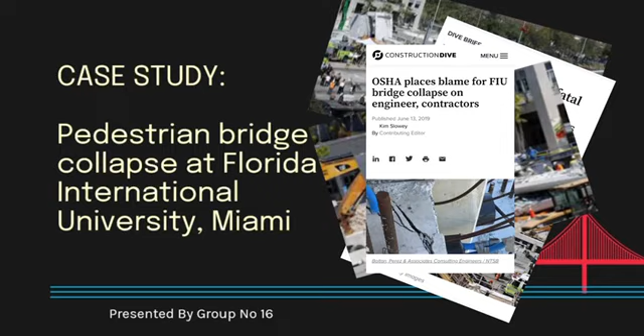Assalamualaikum. My name is Siti Shafilana binti Yunus and I will do the introduction of the pedestrian bridge collapse in Florida.

The accident occurred at Florida International University, which is located in Miami. This accident involved 5 drivers and 1 employee, who suffered fatal injuries. This happened on 15 March 2018 around 1:45 p.m. A pedestrian bridge that was being built collapsed.

This is because the concrete truss had developed numerous wide and deep structural cracks. The bridge was being built as a single concrete truss measuring about 174 feet and weighed roughly 950 tons. Just 5 days before the collapse, it had been placed over the piers. There was supposed to be a concrete truss adjacent.

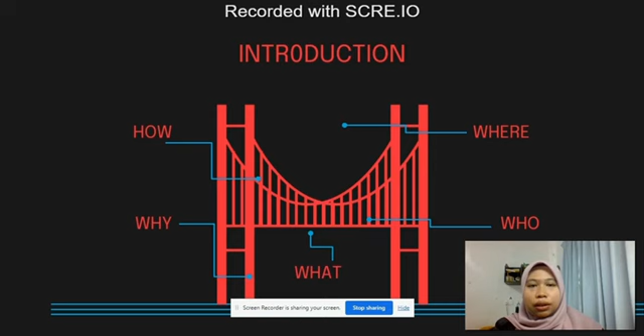Assalamualaikum warahmatullahi wabarakatuh. My name is Indah Shravin Tazari and I will explain my part, which is the cause of the accident. First of all, I will show you the picture of the bridge. The three important parts of the bridge are the deck, the 12 truss members and the canopy. The first cracks happened at truss members number 11 and 12, but I will explain it in detail later.

After the investigation, OSHA stated that the main cause of this accident was the design calculation error made by the structural bridge design consultant, FIGG Bridge Engineers. The first structural reason was the shear failure at the junction where the diagonal truss member joined the bottom deck of the bridge at the northern support node.

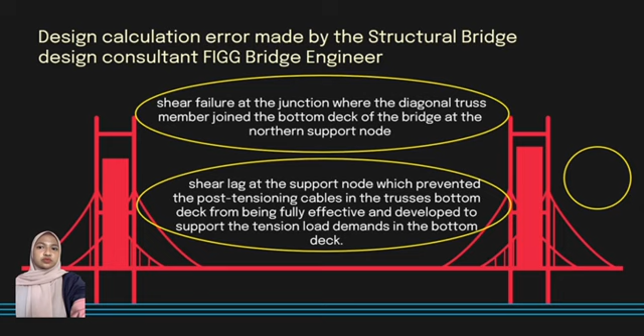The second structural design reason was shear lag at the support node, which prevented the post-tensioning cable in the truss's bottom deck from being fully effective and developed to support the tension load demands in the bottom deck. So I will briefly explain the timeline and the few events leading up to the FIU bridge collapse.

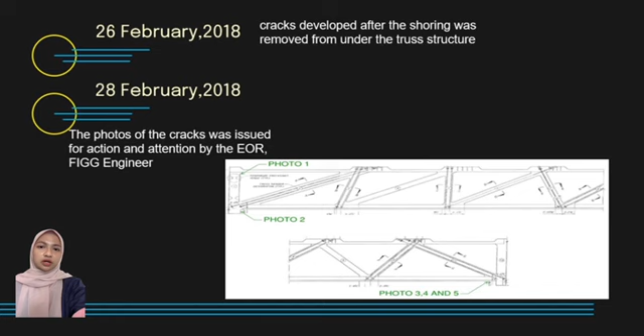The first cracks developed after the shoring was removed from under the truss structure on 26 February, and on 28 February the photo was taken. The photo of the cracks was issued for action by the FIGG engineer, and on 7 March FIGG decided that there was no safety concern for photo 1 and photo 2, and for photos 3, 4 and 5 FIGG asked MCM to seal the cracks.

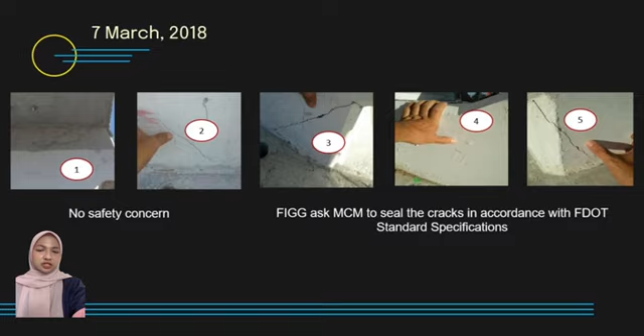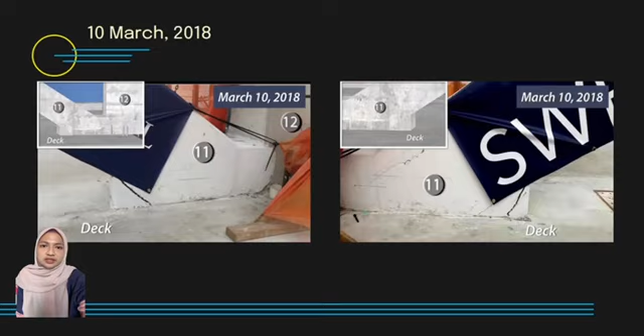The important part is this design was non-redundant, meaning failure of an individual truss member can cause collapse of the bridge. Next, the truss was transported into its final position and placed on the pier and pylon supports. At this time, no other cracks were evident other than those outlined previously on 7 March.

Then VSL, representing the post-tensioning team, was to destress the bars in diagonal members 12 and 11. As they began the destressing process, cracks began to appear at multiple locations around the node point where the bottom of member 11 met the bottom deck of the truss, as you can see in the picture.

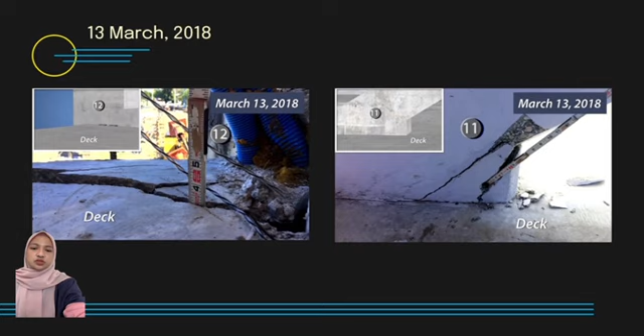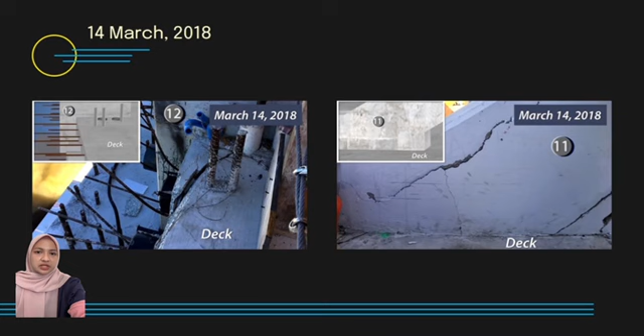The next day, FIGG analysed the cracks and recommended that MCM place shims under the bottom deck of the truss as previously instructed by FIGG. So MCM instructed VSL to proceed with the preparation to retension the PT bars in diagonal member 11. MCM organised a crane to be present on 15 March 2018 to facilitate the works.

In the morning of 15 March 2018, two structural engineers from FIGG attended the site to inspect the bridge and the cracks. Next, a meeting was held with attendees from FIGG, MCM, FDOT and BPA present. FIGG still stuck to their opinion that the cracks did not have any safety concerns.

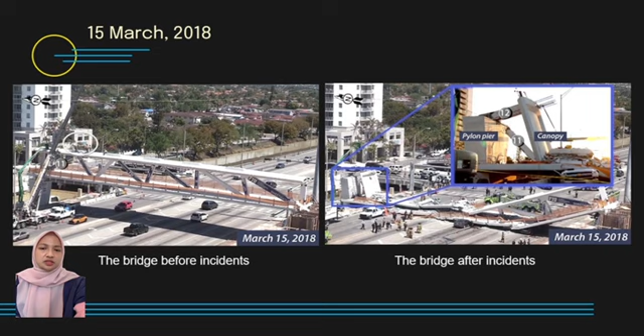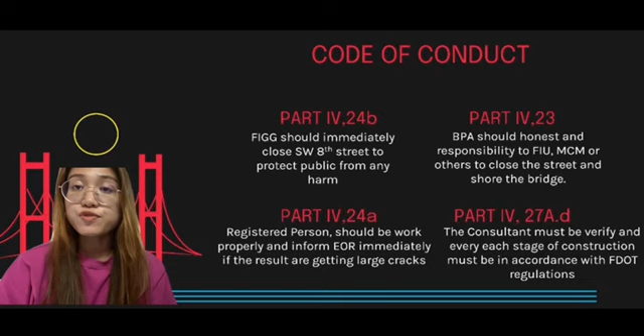It should provide safety first to the public and students. Next is Part IV-24B. FIGG should immediately close SW 8th Street to protect the public from any harm. The fifth is Part IV-23. BPA should be honest and responsible to FIU, MCM or others to close the street and shore the bridge. The sixth code of conduct is Part IV-24A. A registered person should work properly and inform EOR immediately if the results show large cracks.

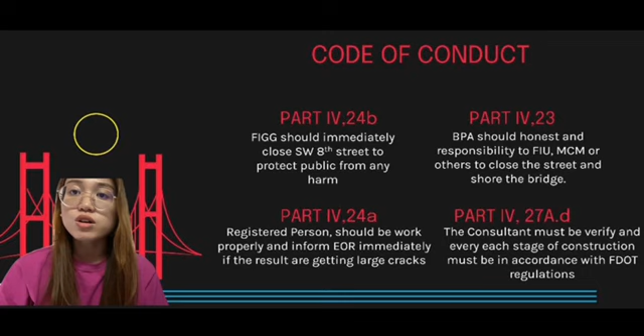Last but not least, the code of conduct related to the ethics. The last one is Part IV-27A.D. The consultant must verify that every stage of construction is in accordance with FDOT regulations.

Hi, Assalamualaikum and good day. My name is Aisha binti Anis. My matric number is 201110736 and I will talk about risk assessment and HIRARC. I will combine these two because the format that I use is the same, but for the HIRARC I will just add the risk control.

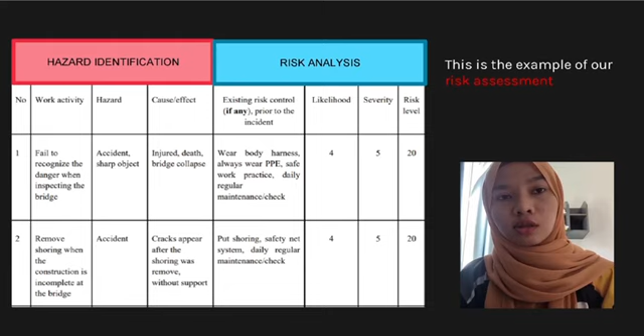Okay, for the risk assessment, first one, the risk level is 20 because the possibility of failing to recognize the danger when inspecting the bridge is high, as it can cause injuries, the project to collapse, and death. For the second problem, the risk level is 20 because removing the shoring when the construction is incomplete caused the crack to appear. It is possibly a big catastrophe.

Next, the risk level is 5 because the engineer relies too much on the computer program when handling the project. Because they didn't detect the crack in the program, they neglected the crack in real life and didn't care for other engineers' opinions. For problem 4, when they neglected the crack, the indifference caused the risk level to be 25 because it is the major cause of the crack widening more and thus the bridge collapse.

For problem 5 and 6, the risk level is 20 because the possibility of motorized cars or engineers or workers being crushed or falling along the bridge is high, and it leads to catastrophic outcomes, which are injuries, permanent injuries, and death.

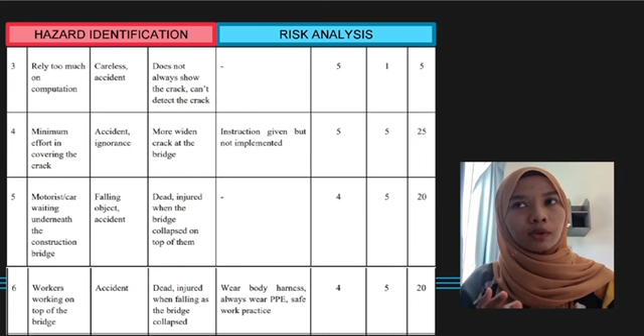For problem 7 and 8, the risk level is also 16 because not closing the street around or during the construction will harm the public citizens with injuries, and affect the surroundings with noise hazard, and heavy loading on the road may cause possible accidents around the public.

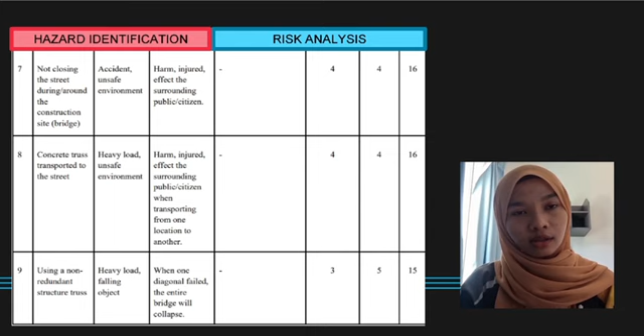For the last problem, which is problem 9, the risk level is 15 as the design is unsuitable and it is conceivable to lead to catastrophe. As one diagonal fails, the entire bridge will collapse. Okay, so we move on to HIRARC. For HIRARC, we just add the risk control.

For the first problem, as in the previous risk assessment, we make sure that the engineers and workers have the qualified certification before being given a task in the construction. And they also have to always wear PPE, follow safe work practice, and do daily regular maintenance. For the second problem, the risk control is we have to do daily regular maintenance and immediately instruct that the bridge be shored so that it can hold the bridge load until the construction is finished.

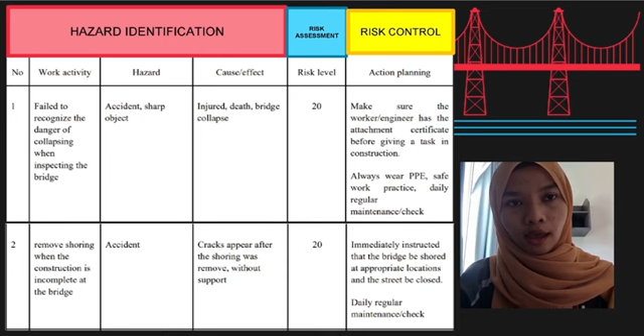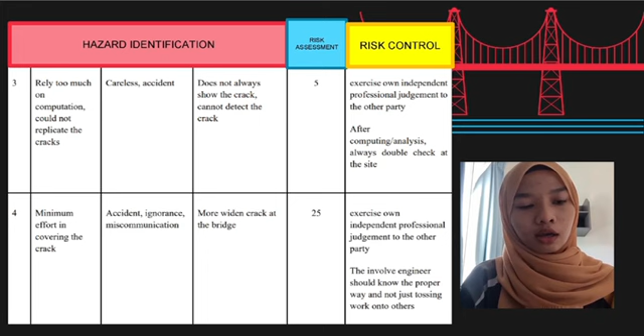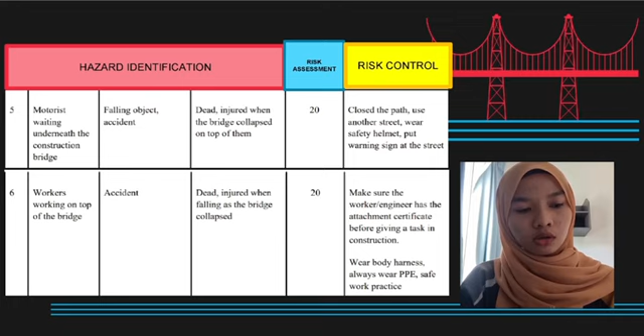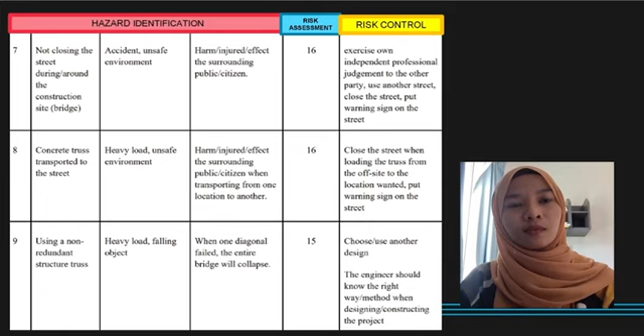From the overall process of hazard identification, risk analysis and risk evaluation, it is noticed that the main cause of this accident is ethical negligence. First, minimal effort covering the cracks. This is due to the negligence of the engineer, which was proven to be the main cause of this case that led to the injuries. Second, ignorance of engineers. The ignorance of engineers in performing their duty well, like removing the shoring when the construction is incomplete at the bridge.

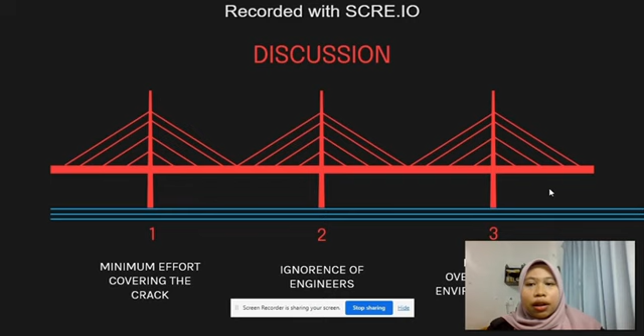Lastly, failure in overseeing the environmental risk. Not closing the street around the construction site during the maintenance, and the concrete truss transported on the street, is proven to be failure in overseeing the environmental risk when construction is ongoing. To conclude the discussion, one employee and 5 motorists were fatally injured and another employee was permanently disabled. This is a number that should be taken seriously.

Members of this profession, engineers, are expected to exhibit the highest standards of honesty and integrity. It is clear that engineering has a direct and vital impact on the quality of life for all people. As stated in the Registration of Engineers Regulations Act 1990, a registered person shall: 1, hold paramount the safety, health and welfare of the public; 2, perform services only in areas of their competence; 3, issue public statements only in an objective and truthful manner; 4, act for each employer or client as faithful agents or trustees;

5, avoid deceptive acts; 6, conduct themselves honorably, responsibly, ethically and lawfully, so as to enhance the honor, reputation, and usefulness of the profession. Therefore, as engineers, it is our responsibility to provide services that are honest, impartial, fair, and equitable, and be dedicated to the protection of public health, safety, and welfare.

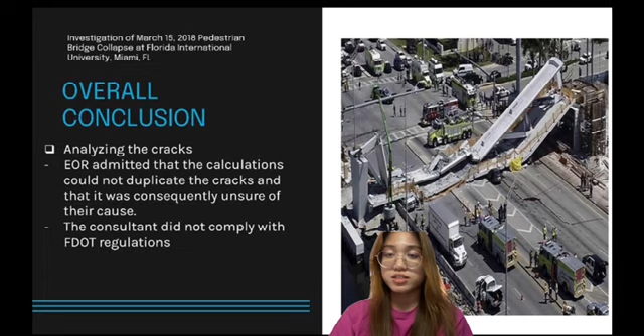Thank you. From analyzing the cracks, the EOR admitted that the calculation could not duplicate the cracks and that it was consequently unsure of their cause. The next is the consultant did not comply with FDOT regulations. That's all from me. Thank you.